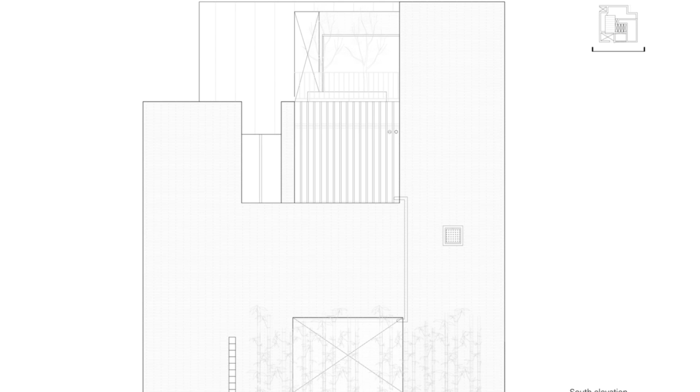So, they came all the way from Gyeongbuk Yeongcheon to Jeollado Gwangju. It must have been hard for them to decide on a 6-hour round trip to Gwangju with a pregnant wife. Still, they had a clear motivation. All of the decisions related to the house were made in consideration of whether the children can have fun and learn in a safe environment, and make valuable childhood memories at the house.

This idea basically needed a wide space, but the land area needed to be bigger, 146 square meters, 44 pyong. It was necessary to capture characteristics that are distinguished but combinable and that are regulated but changeable. So, the basis of the house was designed based on the logic of circulation and connection. From a larger aspect of daily movement routes and life cycles, a house has a nature of circulation.

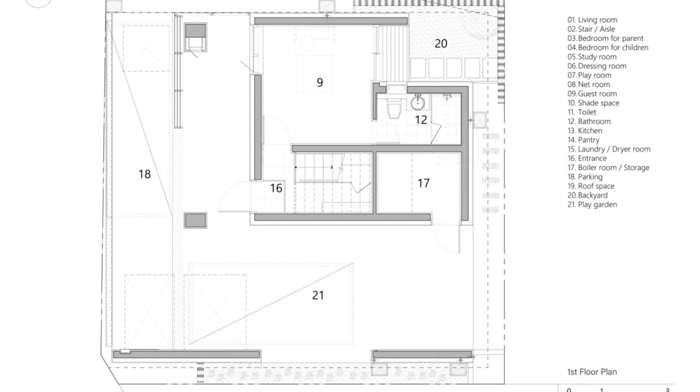In response, stairs were placed in the center of the house floor plan. We designed stairs with 2 bearing walls and 2 open walls to move between floors and support flat slabs. Each room surrounding these stairs plays its own function and connects left and right based on continuity of functions.

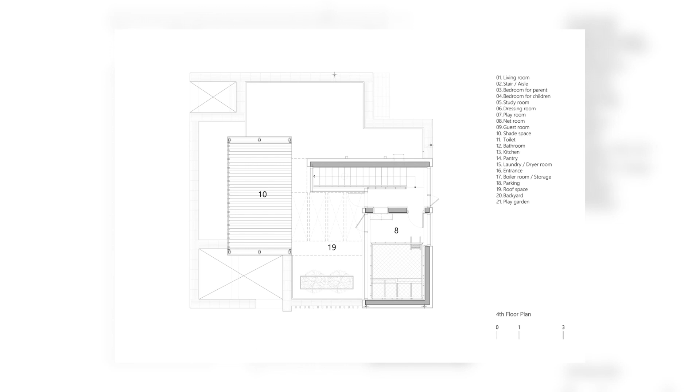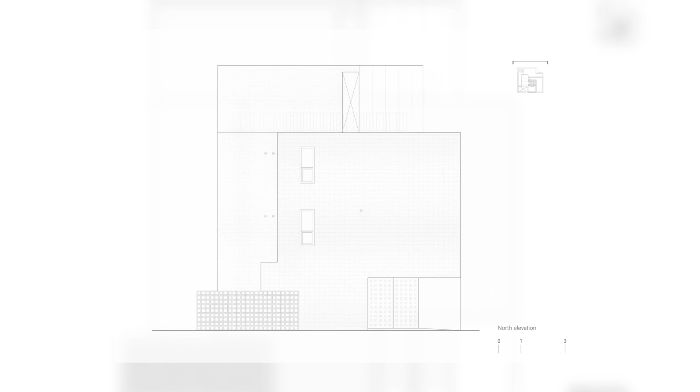In terms of landscape, the house seems quite unfamiliar in first impression. The house feels even more unfamiliar as 30 to 40-year-old houses look drowsy and stagnant, and you cannot find children playing in the street. The street was growing old without new changes, and we added unfamiliar formative principles and unique colors to it. We did not want the house to be forced to be in harmony with its surroundings and be part of the past landscape. Instead, we wanted to capture more practical changes and deliver new positive feelings.

The house design looks unique, but it is still conscious of its relationship with its surroundings. However, it may seem awkward at the same time because there were no architectural attempts in the town. Yeongcheon House of Three Brothers is not a fortress isolated with walls around the house. Instead, it is made with open walls to allow intervention in the relationship with the surroundings. You can still see the silhouettes of people passing through the wall. The laughter of 3 sons also livens up the street beyond an open boundary, allowing wind and light.